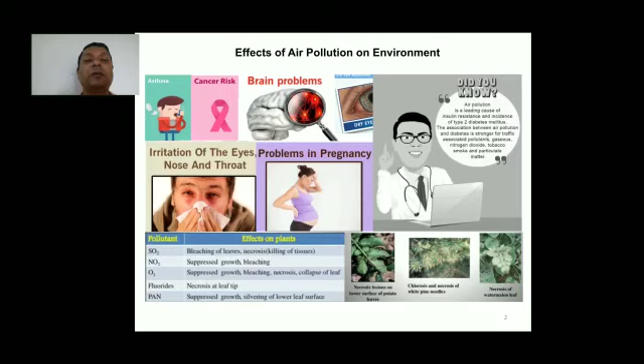So if there is harvesting of leafy plants, there is loss of the harvest. Fluorides: necrosis in leaf tips. PAN: suppressed growth, silvering of the lower leaf surface. Here again are some effects of some air pollutants on the environment. So no need to discuss in detail here. We have already seen some effects of the general air pollutants on human health and plants.

Now effects of industrial air pollutants on human health. So here are some specific air pollutants which come from certain types of industries, and they remain only around those industrial zones, not impacting the regional or global level. So arsenic, this is a suspected carcinogen, causes bronchitis and irritation. Asbestos: pulmonary tuberculosis,

asbestosis. Barium: cardiovascular and nervous system. Boron: toxic, damage to nervous system. Cadmium: damages kidneys, causes diseases of heart and liver. Chromium: toxic substance, suspected carcinogen. Mercury: adversely affects protoplasm. Phosphorus: skin irritation, affects nervous system. Radioactive substances: cancer, leukemia. Zinc: damages mucous membrane.

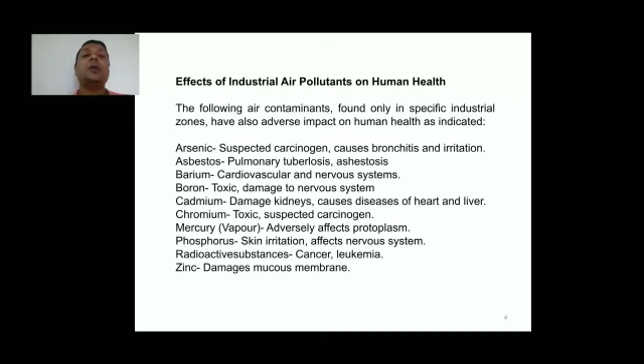Now here is the global effect of air pollution. One of these is the greenhouse effect. So we have to understand what the greenhouse effect is. In colder regions, they want to grow plants, but they are unable because it is too cold, so plants cannot grow there. So in that case, they do the plantation and cover that area with glass. So the sun's short waves enter through this glass and heat that area.

So now these gases convert the sun rays, which come as short waves, into heat rays. This is in the form of infrared or long wavelength. So certain infrared cannot pass through the glass and is retained inside that glass chamber or house, but long wavelength radiates to the atmosphere. So in that way the infrared is retained there and creates a warmer atmosphere in favor of these plants.

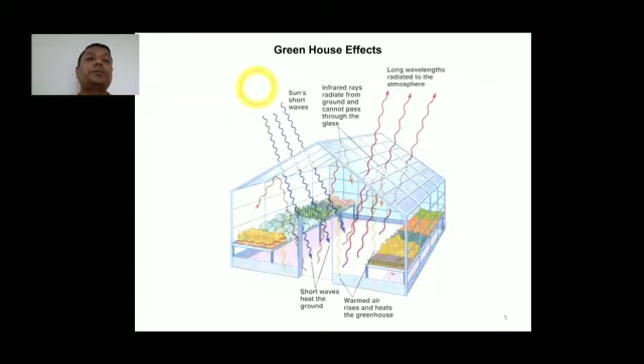Now see in this picture what is actually happening on the earth. Sun rays come through the different atmospheric layers and reach the earth's surface. Some portion of these rays is reflected back into the atmosphere, some by the clouds, some by the aerosols, and some due to other particles in the atmosphere. Around 50% of the sun rays are absorbed at the earth's surface, and 4 to 6% of the light reaching the earth's surface is reflected back into the atmosphere. So this is the normal phenomenon and normal temperature on the earth.

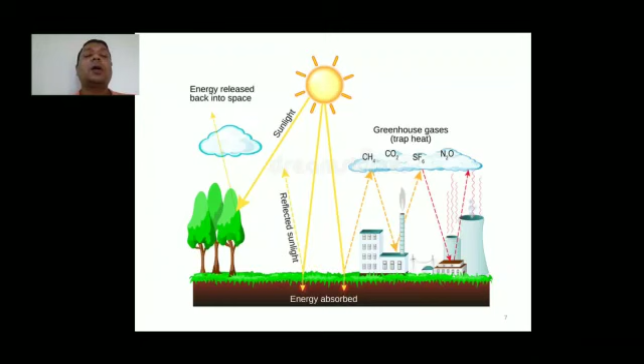Now see what is happening now. When certain greenhouse gases are emitted from industrial or man-made activities, these gases form an extra layer, or we can say thicken the existing layer of these gases. The sunlight reaching the earth goes back toward the atmosphere, but due to the thickness of these gases, or the extra layer of greenhouse gases, this heat comes back to the earth. This phenomenon continues, and due to it the greenhouse effect exists, and due to this greenhouse effect global warming happens. So here are some impacts of the greenhouse effect.

The temperature on earth may increase by about 1.5 to 4 degrees centigrade by the year 2050. As a result of increased temperature, the polar ice caps may melt vigorously, and there would be a rise in ocean level, threatening the population near coastal zones. The flora and fauna would also be adversely affected by the increased temperature.

Some of the organisms may become extinct, as they may not be able to tolerate the high temperature. Human health could similarly get affected. Sudden changes in the climate, formation of cyclones, and instability of seasonal cycles are expected to occur. As you have seen, many birds which earlier we were seeing are now not available. Maybe this is a direct or indirect effect of the greenhouse effect or global warming.

Ozone layer depletion. This is also a global effect of the air pollutants. Chlorofluorocarbon is extremely stable. It does not dissolve in the rain and rises up into the atmosphere efficiently. But strong ultraviolet rays break down chlorofluorocarbons, which releases chlorine atoms. The chlorine atoms bond with one of the oxygen atoms in an ozone molecule. The other two atoms become an oxygen molecule.

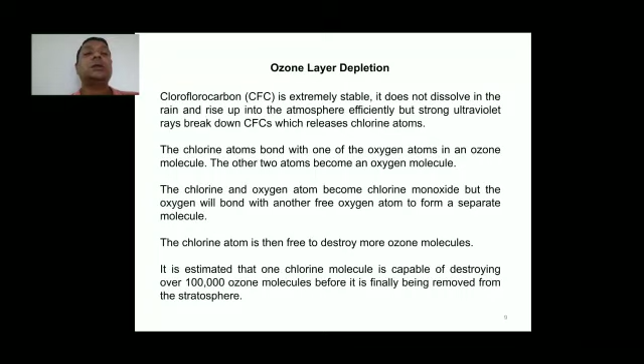So here is the same reaction I explained earlier. The chlorofluorocarbon is available, CFCl3. Now this breaks into CFCl2 plus Cl, and this free chlorine atom reacts with the ozone available in the stratosphere of the atmosphere, and makes the product chlorine monoxide, and the oxygen molecule remains here.

Then this chain reaction again releases the chlorine and oxygen, the oxygen adds another oxygen atom to make the oxygen molecule, and this chlorine atom again reacts with the ozone, and this reaction continues going on. So in some places the ozone layer is thinning, so this ultraviolet may reach the earth and give a negative impact.

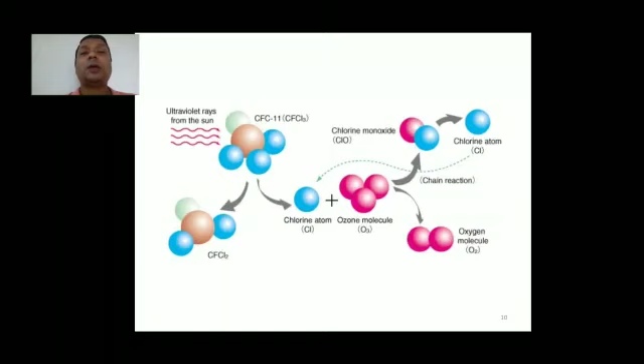So the global use of chlorofluorocarbon: aerosol 25%, foam insulation 19%, solvent 19%, air conditioning 12%, refrigerant 8%, flexible foam 7%, others 20%.

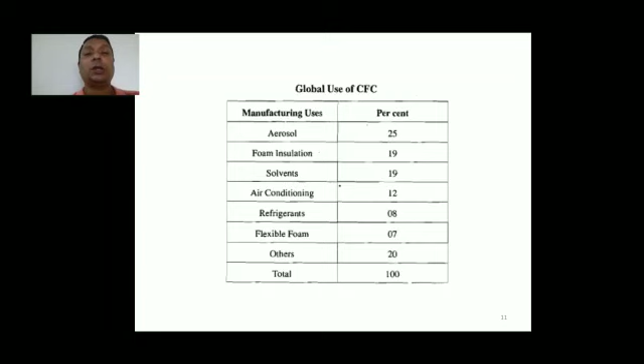So another effect of the air pollutants is acid rain. We can say this may be a regional or local effect. There are certain air pollutants, sulfur dioxide and nitrogen oxides. They form sulfuric acid or nitric acid because some water vapor is available. So this is the dry deposition.

But when rain is falling, this acid mixes with the rain and comes down on the earth, and this is the wet deposition, and this has an effect on the growth of different types of plants, and it impacts building structures also.

Now, air pollution control approaches. Pollution prevention: to reduce, eliminate or prevent pollution at its source. For example, farmers can reduce air pollution by conducting hazard reduction burning at times when smoke impacts are likely to be minimal. This is pollution prevention. Clean Air Technology Center. This serves as a resource on control technologies, including their use and effectiveness. For example, we use wet scrubbers, fabric filters, electrostatic precipitators, condensers, absorbers, adsorbers, and biological degradation.

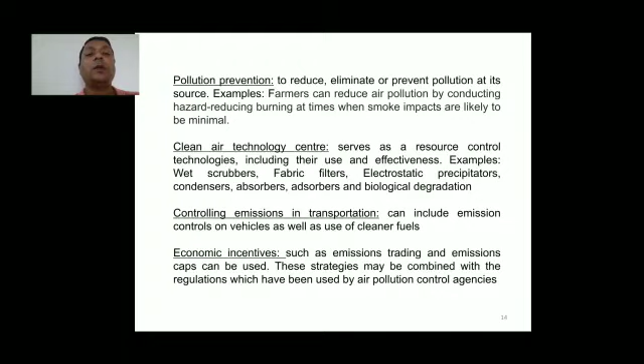Controlling emissions in transportation. This can include emission control on vehicles as well as use of cleaner fuels. Economic incentives such as emissions trading and emission caps can be used. These strategies may be combined with the regulations used by air pollution control agencies. Factors in designing air quality control strategy. Environmental factors such as ambient air quality conditions, relevant meteorological conditions, location of the emission source, noise levels, and any ancillary pollution from the control system itself.

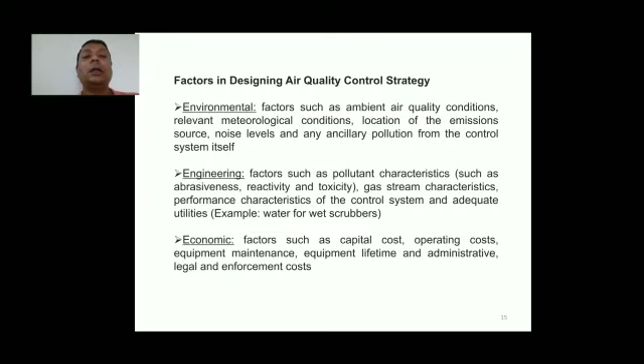Engineering factors such as pollutant characteristics, gas stream characteristics, performance characteristics of the control system, and adequate utilities. Economic factors such as capital cost, operating cost, equipment maintenance, equipment lifetime, and administrative, legal, and enforcement cost. Dilution. Tall chimneys discharge the contaminants at a higher level from the ground where they get diluted in the atmosphere. Thus, the concentration of contaminants at ground level is greatly reduced.

Control at source. The pollution at source can also be considerably reduced by adopting one or more of the following strategies: changing the location of the industry, changing the type of fuel for the industry, changing the process of manufacturing, and installation of properly designed air control equipment, devices that help in reducing particulate matter, and devices that reduce gaseous pollutants.

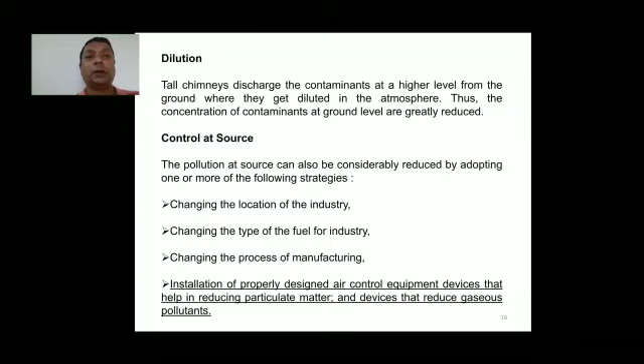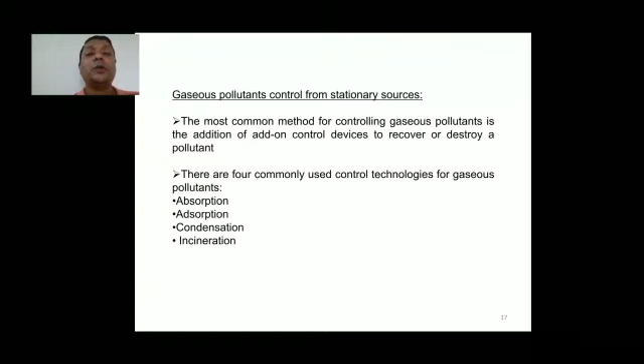So now the gaseous pollutant control from stationary sources. The most common method for controlling gaseous pollutants is the addition of add-on control devices to recover or destroy the pollutants. There are four commonly used control technologies for gaseous pollutants: absorption, adsorption, condensation, and incineration.

What is absorption? Absorption is a physical or chemical process of removing pollutants from a gas phase media by dissolving the pollutant into a solvent medium. Solvent media is most commonly a liquid phase. The material that absorbs is called the solvent, and the gas that is to be absorbed is called the solute.

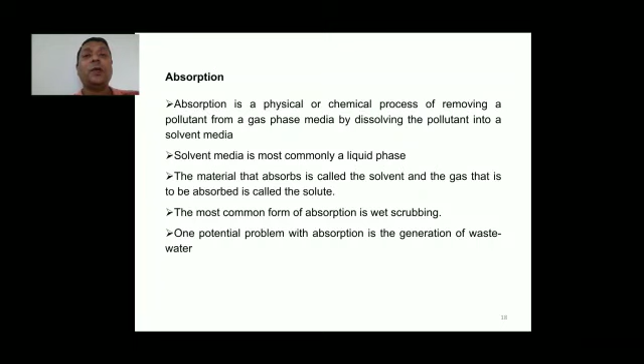The most common form of absorption is wet scrubbing. One potential problem with absorption is the generation of waste water. So here we are removing the air pollution but producing waste water.

Here we are seeing the process. The gas stream that contains the pollutants to be removed enters from the bottom of the scrubber, as we are seeing in the picture, and quickly turns upward towards the exhaust at the top of the scrubber. The random packing provides the necessary surface area to distribute the liquid solvent and encourage contact between the two media.

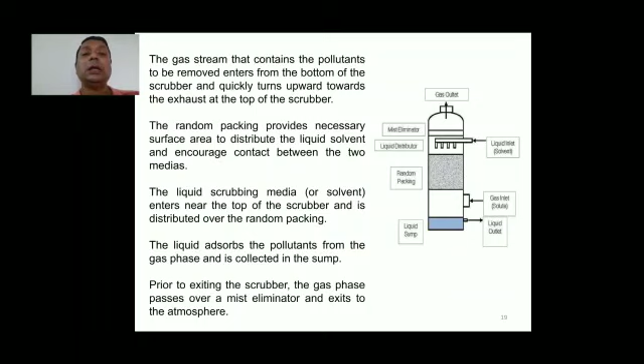The liquid scrubbing media or solvent enters near the top of the scrubber and is distributed over the random packing. The liquid absorbs the pollutant from the gas phase and is collected in the sump. Prior to exiting the scrubber, the gas phase passes over a mist eliminator and exits to the atmosphere.

Now adsorption. Adsorption is a mass transfer process in which a porous solid comes in contact with a liquid or gaseous stream to selectively remove pollutants by depositing them onto the solid. The contaminants being removed are referred to as the adsorbate, and the solid doing the adsorbing is called the adsorbent.

The most common industrial adsorbents are activated carbon, silica gel, and alumina because they have enormous surface area per unit weight. Carbon adsorption systems are either regenerative or non-regenerative. A regenerative system usually contains more than one carbon bed. As one bed actively removes pollutants, another bed is being regenerated for future use.

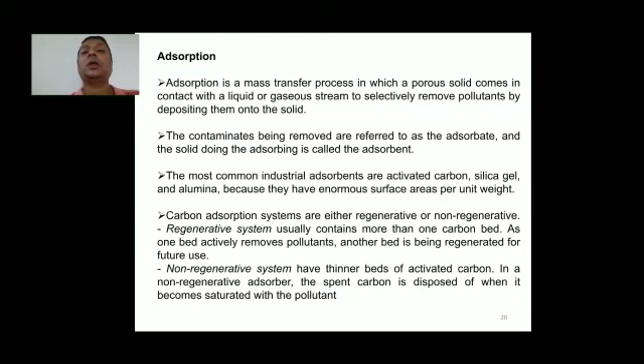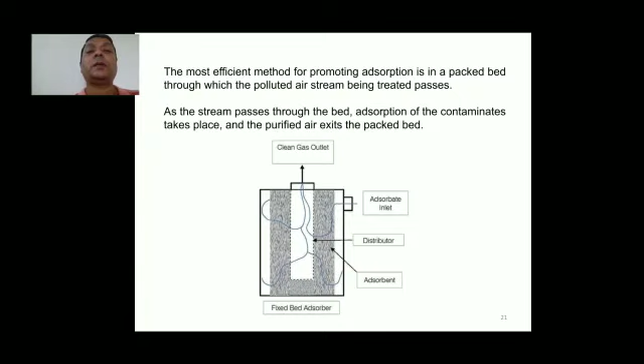So the most efficient method for promoting adsorption is in a packed bed through which the polluted air stream being treated passes. This passes from here through this adsorbent. As the stream passes through the bed, adsorption of the contaminants takes place, and the purified air exits the packed bed.

Condensation. Condensation is a process to convert a gas or vapor into liquid. Any gas can be reduced to a liquid by sufficiently lowering the temperature or increasing the pressure. Condensation can be used to remove a pollutant from a gas stream if the dew point of the pollutant is higher than the carrier gas, which is a non-polluted gas.

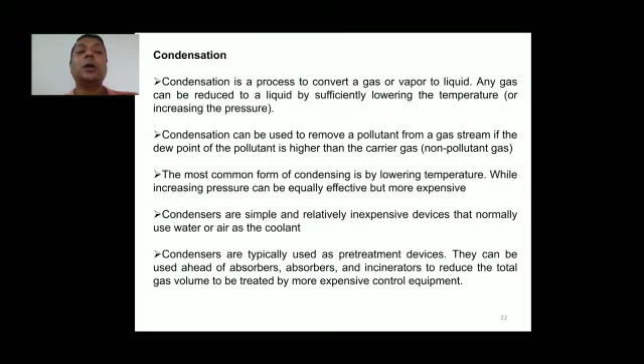The most common form of condensing is by lowering temperature, while increasing pressure can be equally effective, but this is the more expensive process. Condensers are simple and relatively inexpensive devices that normally use water or air as the coolant. Condensers are typically used as pre-treatment devices. They can be used ahead of adsorbers and incinerators to reduce the total gas volume to be treated by the more expensive control equipment.

So here is the mechanism. Condensers work when the warmer vapor stream contacts a cooling medium. The heat from the warm gases is transferred to the cooler medium. Then as the warm gas stream begins to cool, the kinetic energy of the gas is reduced. Condensation occurs because the pollutant molecules are slowed and crowded so close together that the attractive forces between the molecules cause them to condense into a liquid.

Condensers used for pollution control are of two types: contact condensers and surface condensers. In a contact condenser, the gas comes into contact with cold liquid. In a surface condenser, the gas contacts a cool surface, not the liquid, in which cool liquid or gas is circulated, such as the outside of the tubes or inside of the tubes.

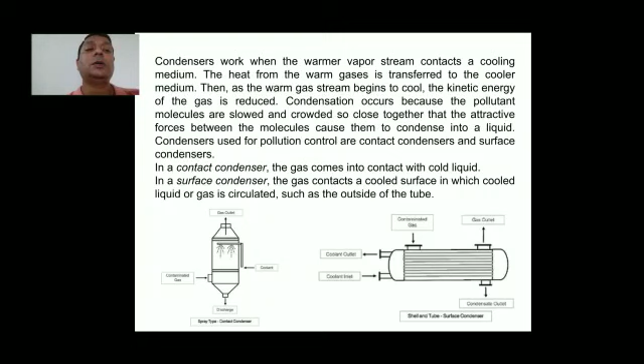Incineration. It can be defined as a rapid combination of oxygen with a fuel. This process will result in the release of energy in the form of heat, carbon dioxide, and water. The air control industry typically refers to the equipment which performs this process as oxidizers.

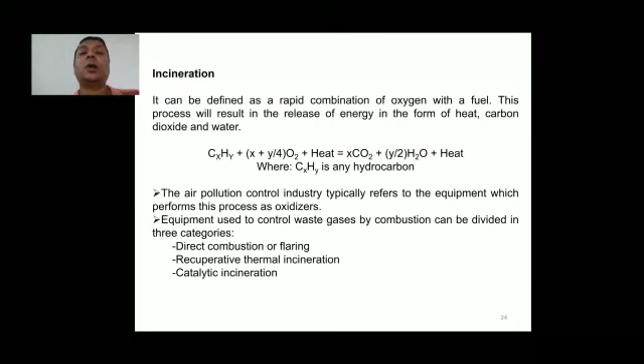Equipment used to control waste gases by combustion can be divided into three categories: direct combustion or flaring, recuperative thermal incineration, and catalytic incineration. Direct combustor. It is a device in which air and all the combustible waste gases react at the burner. Complete combustion must occur instantaneously since there is no residence chamber. A flare can be used.

The process stream is heated up to thermally oxidize the volatile organic compounds in the process stream. This is usually a temperature of 760 degrees centigrade or maybe higher, depending upon the volatile organic compounds to be destroyed.

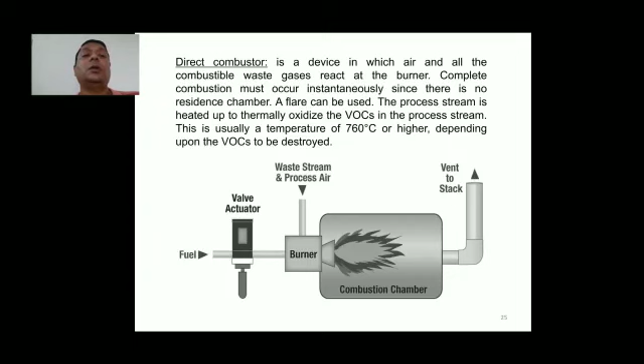Recuperative thermal incinerator. The combustible waste gases pass over or around a burner flame into a residence chamber where oxidation of the waste gases is completed. This technology is similar to a direct thermal oxidizer, except recuperative thermal units use a heat exchanger to recover heat from the oxidizer exhaust and preheat the incoming process air to conserve fuel.

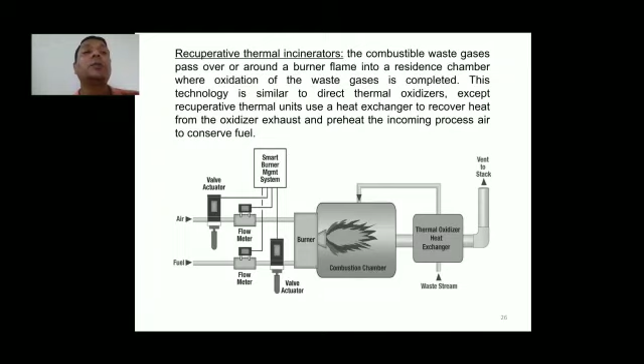Catalytic incinerators. These are very similar to thermal incinerators. The main difference is that after passing through the flame areas, the gases pass over a catalyst bed. The purpose of the catalyst is to promote oxidation at lower temperature, thereby reducing the fuel cost.

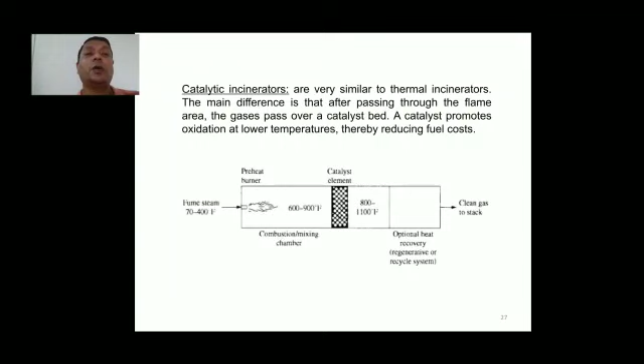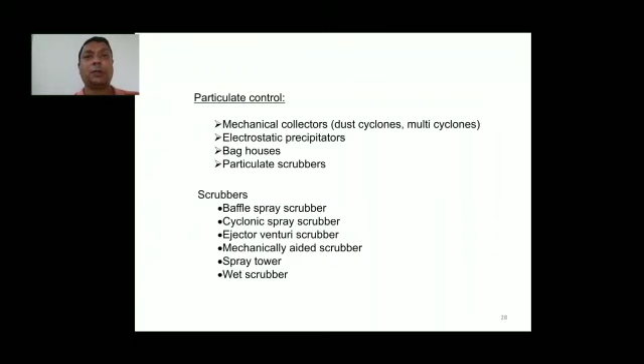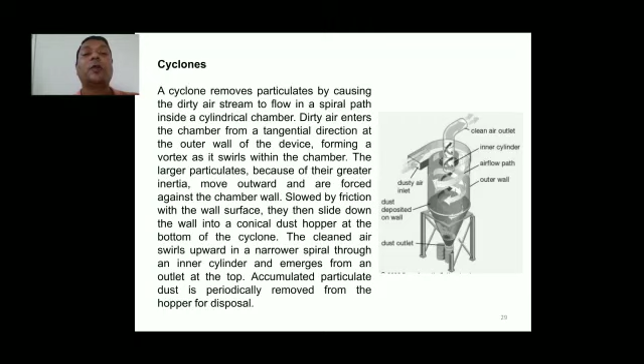As it swirls within the chamber, the larger particulates, because of their greater inertia, move outward and are forced against the chamber wall. Slowed by friction with the wall surface, they then slide down the wall into a conical dust hopper at the bottom of this equipment. The clean air swirls upward in a narrower spiral through an inner cylinder and emerges from an outlet at the top. Accumulated particulate dust is periodically removed from the hopper for disposal.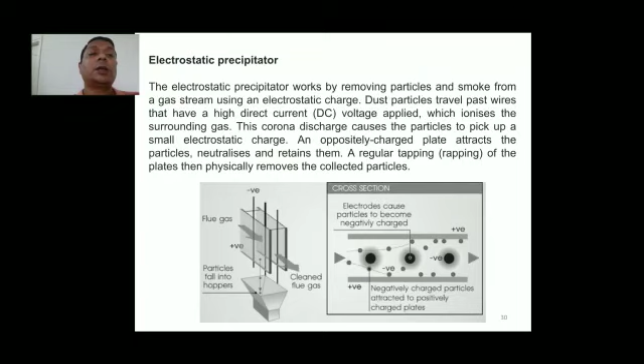An oppositely charged plate attracts the particles, neutralizes and retains them. A regular tapping of the plates then physically removes the collected particles, as we are seeing in the figure. So negatively charged particles are attracted by the positively charged plates.

Bag filters. Bag filters use fabric bags to remove particles from dust-laden gas. As dust-laden gas enters the bag house compartments, larger particles drop out into the hopper and small particles collect on the filter bag or media, forming a layer or cake. Clean gas passes through the media. Mechanical shaking, a reverse airflow, or a pulse of compressed air are used to dislodge the dust from the fabric surface, which then falls by gravity into a collection system.

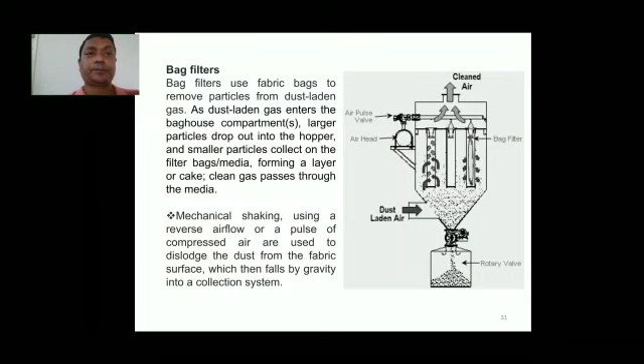Biofiltration, an air pollution control technology which utilizes microorganisms to biologically degrade odors and other volatile air pollutants contained in waste air streams. The microorganisms exist on the surface and in a thin water film surrounding the surface of the biofilter material. The pollutants are adsorbed onto the material surface and absorbed into the water film.

Simultaneously, the microorganisms metabolize the pollutants, producing energy, biomass, and metabolic end products, mainly carbon dioxide and water. As we are seeing in the picture, the whole process.

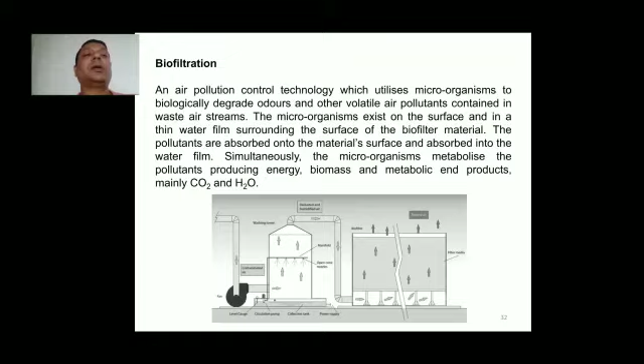So all this is about the technology we are using in the industry or the manufacturing unit from where air pollutants are coming out, and before entering the environment, these air pollutants are trapped due to these technologies, and completely clean air exits from these industries.